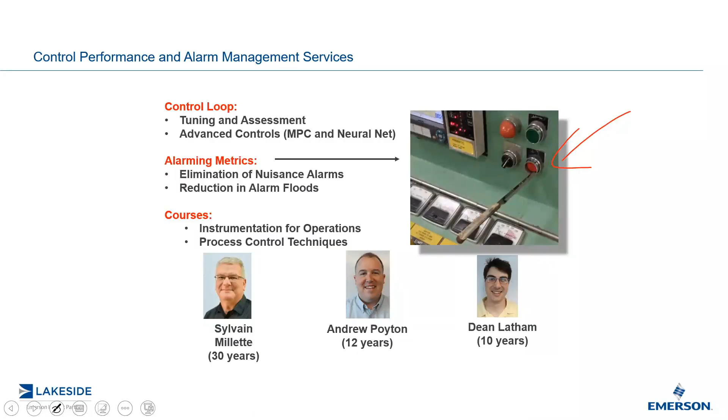And that's not a stock picture there. That's an actual picture that we took at a customer site, where this alarm kept going off and someone decided to stick a steak knife in there.

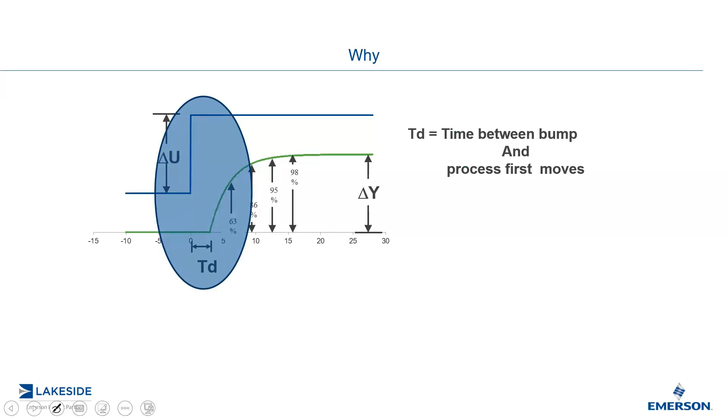So why? What is dead time? Dead time is the time delay. Please don't call it lag. Lag is a time constant. It's one of my pet peeves, but if you do, that's okay. But it is time delay or dead time from the moment I make my bump to the moment I first start seeing a change in my process.

A typical PI or PID controller is a very, very impatient beast. When it makes an output change, it expects to see a change right away on the PV, not, quote unquote, knowing that there's any kind of time delay. And so time delay is the single most destabilizing process parameter in the entire universe.

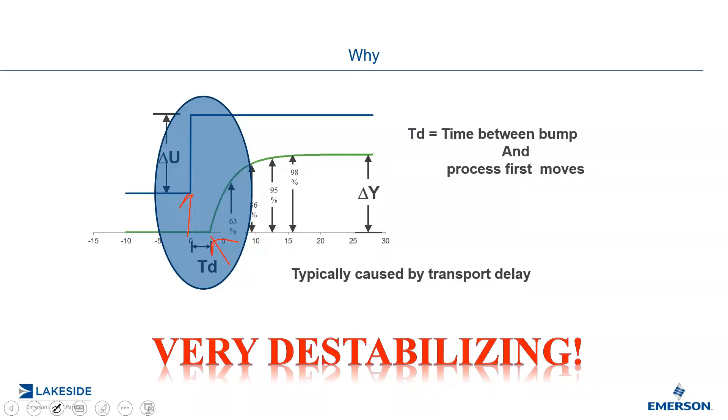Why do we have dead time? Well, some processes require dead time. So think about the pH here. We're adding caustic here, and obviously a chemical neutralization must occur before we can measure the pH.

As a matter of fact, I encountered that last week where it was effluent pH I was trying to control. I did some bump tests. This is a bit of a side note. I did some step changes back in July when the water was warmer, and the reaction was, quote unquote, normal. But what happened now is that we were measuring pH, but the temperature, instead of being 21 degrees, was 1 degree Celsius.

What I believe happens is that, as chemical reaction rate doubles every 10 degrees Celsius, the reaction rate was so much slower that I was actually measuring residual sulfuric acid, which is what I was injecting. And so therefore my process was extremely sensitive. The solution there would be to move the sensor further down to allow the sulfuric acid to react and therefore measure the proper pH.

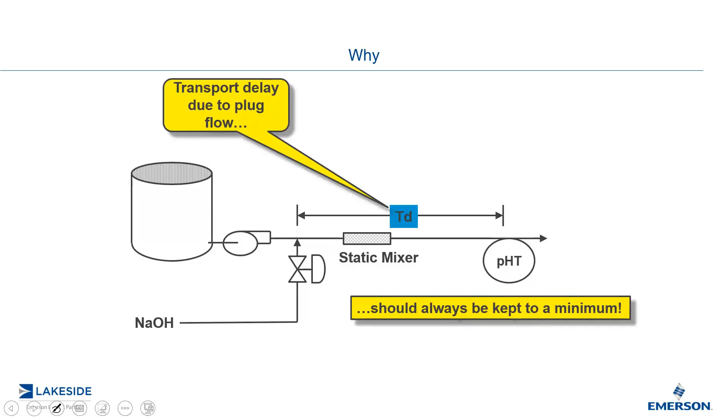But I digress. Now, the other issue here, when I say that the dead time should be kept to a minimum. And why is that? It's because I've seen a lot of times where we're going to install our pH over here somewhere. And even though we know that the chemical reaction will have occurred there, instead of having 20 seconds of time delay, we will now have 2 minutes and 20 seconds of time delay.

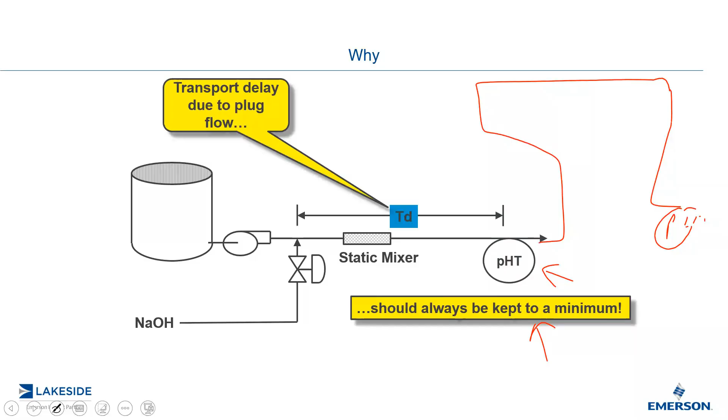I've seen this before, where they actually had to install a pH meter in another building because the other building was not an explosive atmosphere, and they didn't want to spend the extra money to buy an intrinsically safe pH meter and put it in the same building. So when we design our processes, it's important to understand, yes, some processes do require dead time, but keep it to an absolute minimum.

Not to say that a PI or a PID controller can't handle an excessive amount of dead time, but we have to build so much robustness, aka detune it a little bit, that we may end up losing out on control opportunities.

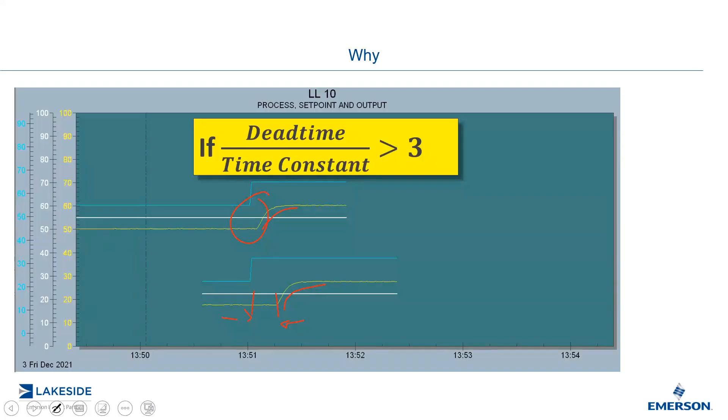Now, there are different types of dead time compensators out there. In DeltaV, there's the MPC block. MPC stands for Model Predictive Control. We have MPC, MPC Plus, and MPC Pro, and obviously it increases in complexity and capabilities. The MPC block, the most common one, can handle up to, I believe, 8 inputs and 8 outputs. So it can compensate for the time delays in your process.

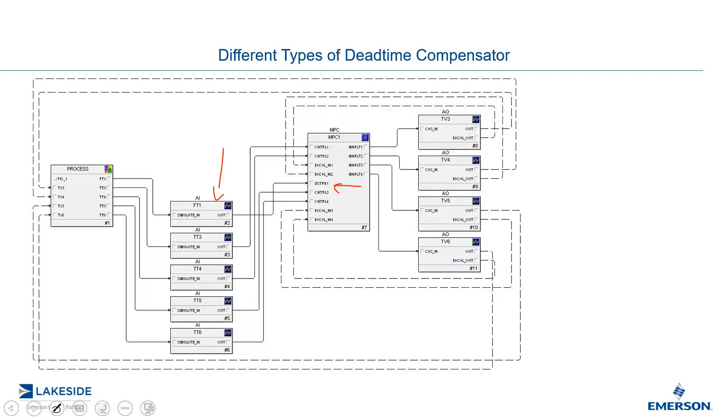There's also dynamic matrix control, DMC. I think Mr. Charles Cutler developed that in the 70s, if I'm not mistaken, for Shell Oil. There's also the Dahlin controller, which is used mainly in pulp and paper on paper machine controls. I'm sure there's a whole bunch of other ones out there as well.

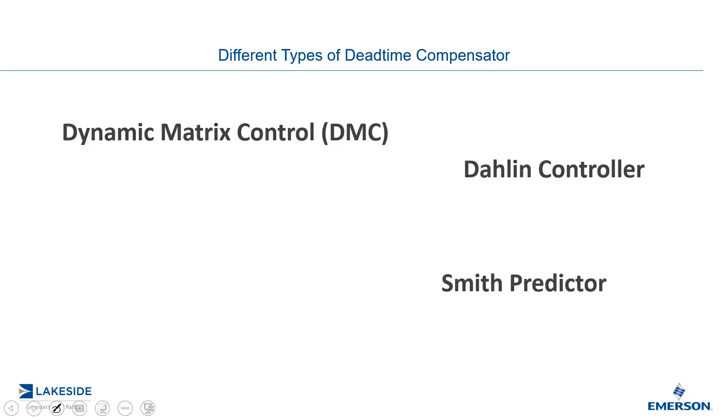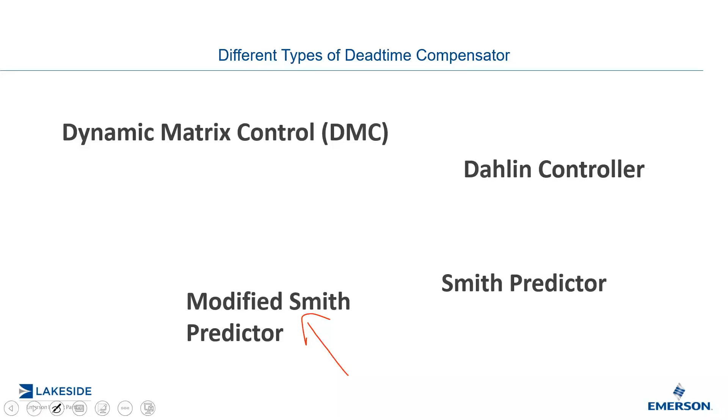They all have a similar, common theme, and I'll talk about that in a minute. There's also the Smith predictor and the modified Smith predictor. The modified Smith predictor is the one we're going to talk about today. I don't want to talk about MPC because you're not all DeltaV users. So I want to talk about something that you can build within your own distributed control system.

So how does this work here? So first of all, we got to understand the process. You've heard me say this before, thou shalt know thy process. And our process will have a process gain, a process dead time or time delay, and a time constant.

And what we're going to do is that we're going to build a model, aka a simulation, aka a digital twin. That's what they call it these days. I don't know why. It's just a model, a high fidelity model, where we know we'd have to do bump tests, and we know the process gain, we know the dead time of the process, we know our time constant, and therefore, obviously, this plus this is going to equal your process variable.

And then what we're going to do is that we're going to measure the difference between where our model prediction is and where our actual value is. The difference then will be either process disturbances or model mismatch. We'll talk about model mismatch later on.

Now you have to understand here that the PID controller does not look at the actual process variable. What it does is that it actually looks at the model value and the differences coming between the model and the actual process. And so what we're doing is that we're controlling a model and we're injecting real life information about the process through that addition block.

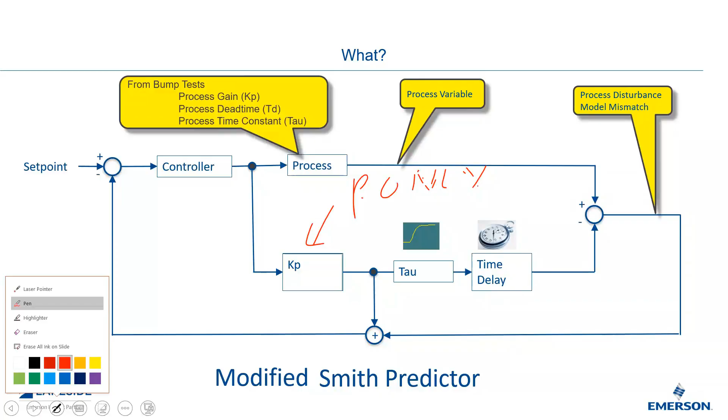So in this case, it's very difficult to tune a proportional only controller and have it overshoot and have it go unstable. So we're adding a bit more robustness by using a proportional only process. Once again, though, I'm going to repeat myself, the controller still works off the model, and we're injecting real life disturbance process information via the addition block.

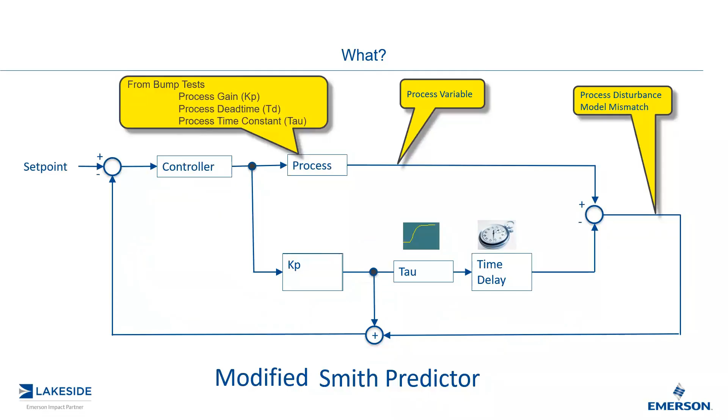So this is how I programmed it, and it's actually surprisingly simple to program this. So the upper part is a simulated process, obviously. And what I did is that I went through a characterizer block. I could put a mild nonlinearity there if I wanted to. I didn't. I left it linear. So basically just a linear input.

I put in 2 time constants of 2 seconds. So I made it second order just to make it a little bit funkier, a little bit different. There's my dead time block, and my process is at 15 seconds of dead time. That's the process dead time.

This here is a block where I can actually add a bit of noise, a bit of offset. And if I want to, I can actually inject a load disturbance. All that gets added up, and this is my process right here, right there.

Now for my Smith predictor, you can see I have my PID block right there, and it sends the output here, but it also sends it down to here. This is where I set my model, my simulation. I'm trying to simulate my process model. And if I do a good job, my process model will equal my process.

And here's my model process gain, my model time constant. Note here that I've only made it a first order process, so there's already a little bit of model mismatch going on, and my model dead time.

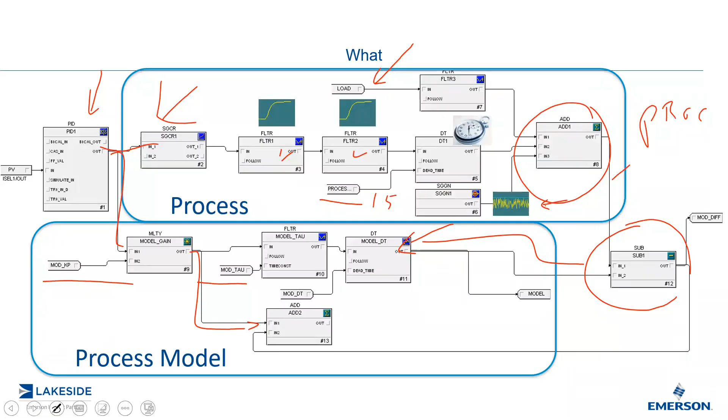If you remember before, so this is going to be my model here, and I am subtracting the model from the process, and then I'm adding that to the actual proportion only part right here. I know there's a lot of stuff being written here. Let me just erase all that.

And so what we're going to do is that part here will get sent over here as done programmatically. There you can't see a line, but they're actually connected. The PV then becomes input of the PID block right there. So what I'm going to do is I'm actually going to flip over and show you a live demonstration here.

So here are the model dynamics that I have right now. So I have a model dynamic of process gain of 1, a model time constant of 3 seconds, and a model dead time of 15 seconds. And right now we're all pretty much bang on in terms of our model. There's actually very little model mismatch.

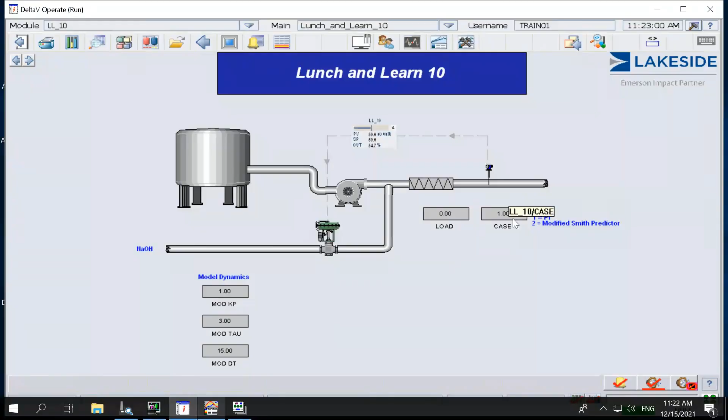You can see here I can add a load disturbance if I want to, and the case. So here, case 1 is PI control, and case 2 is your modified Smith predictor. So what I have done here is that right now I'm in PI control mode. And the tuning is just regular tuning. Here I have a controller gain of 0.3 and an integral of 8 seconds. So right now I'm in PID mode.

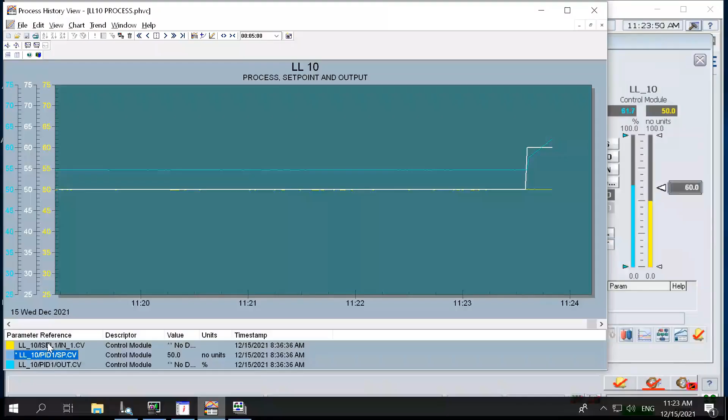So I'm going to change the set point here from 50 to 60%. And you'll see there's your output. For those of you who are not familiar, the blue line is the output command out of the PID. The white line is the set point of the PID block, and the yellow is the actual process variable.

And as you can see, the PID controller is reacting, and I tuned it fairly conservatively so that it will actually control. But obviously we have to compensate in our tuning practice, our tuning calculation, for the excessive amount of dead time, the 15-second dead time that we have here. And as you can see, it's reaching up, so it's actually pretty good.

So the next thing I want to do, this is kind of fun. I'm going to make the tuning more aggressive. So I'm going to increase the gain from 0.3 to 0.6. I'm doubling the gain. I'm going to make the integral faster. For those of you not aware, the smaller the number in integral, if it's seconds per repeat or minutes per repeat, the more integral action I have. And I'll make that 3 seconds.

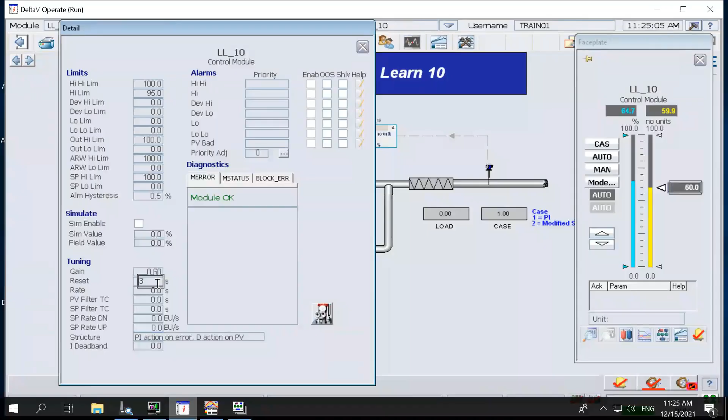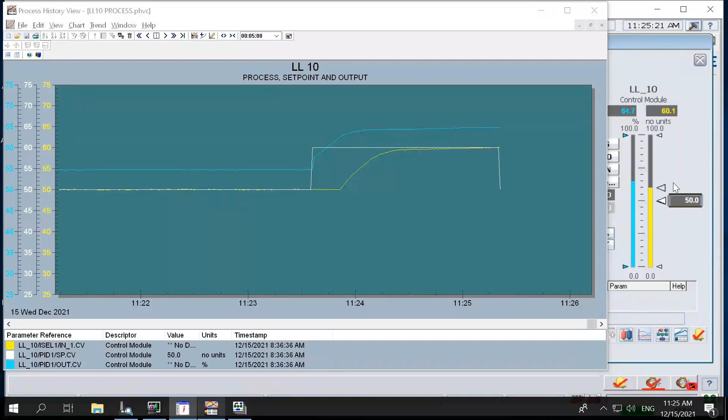So now I'm going to go back to my trend, and I'm going to make the same set point change back down from 60 to 50%. Now you can see there, obviously with the higher gain, I got a lot more proportional kick, and you can see the integral taking over because the PV still hasn't changed. It's ramping down very, very quickly. And now suddenly the process starts to react. And I'm pretty sure you can see what's going to happen. It's slowly going to go unstable.

Now I'm going to let it go for a little bit here, and then after that I'm going to switch over. As a matter of fact, this is really going unstable. So we'll just change the scaling here. There we go. So you can actually see it is going unstable. And obviously we tuned it way too fast because we have a dead time dominant process.

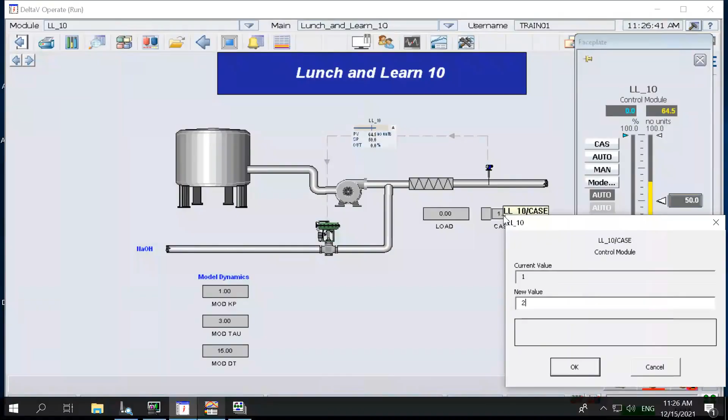So the next thing I'm going to do, oh, there we go. Okay. So what I'm going to do now is change the controller mode from a PI controller to the modified Smith predictor. Let's see how that works. So you can see here a little bit of jagged responses when I switched over. And that's because there's some slight model mismatch. Again, I'm going to talk about that later on.

Now, let's wait for a little bit here, but you can see obviously now the output is behaving a lot more stable. And you can see the PV will reach set point shortly.

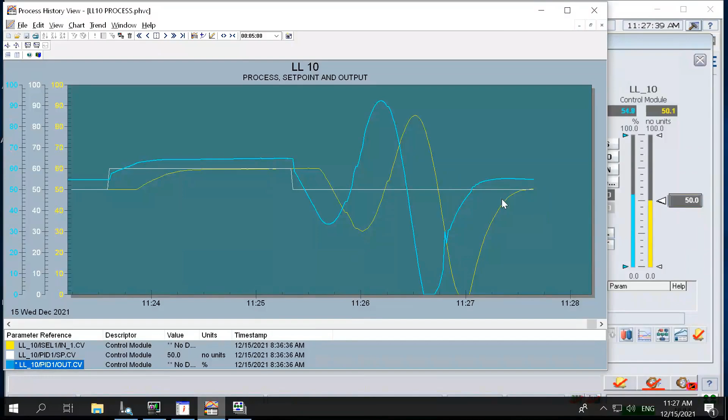So that was when I first tried this. I was still kind of amazed how just that one change made it very, very stable following the unstable part right here under PI controller. And what I'm going to do now is that I'm going to change the set point back from 50 to 60.

And you'll see the controller essentially is working off the model, but now also with real life process disturbances injected into it. And you can see the PV coming up to set point. So I'm going to show this a little bit more during my slides, but I just want to pause here for a second and just let you see how it reacts.

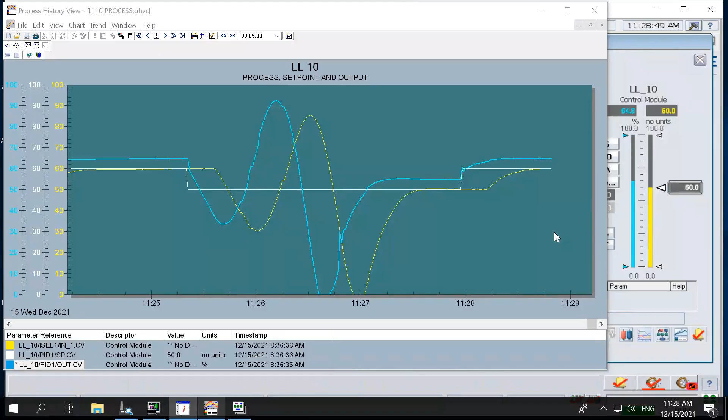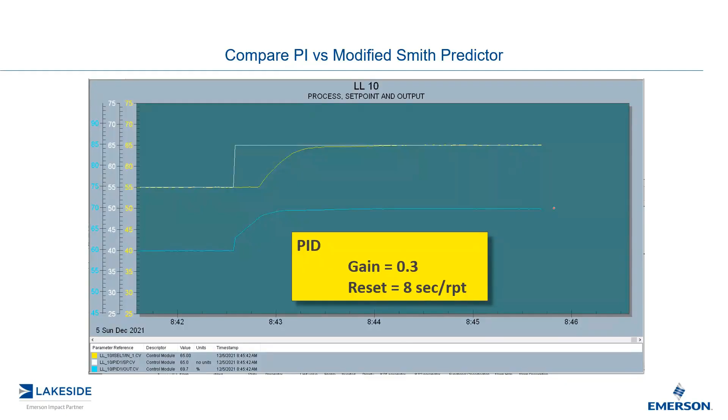And you've got to understand here that I've actually tuned it quite aggressively, very aggressively, but because of the model compensation, it's able to react properly. Okay. So this is a bit of a comparison. There's the same gain of 0.3 and a reset of 8 seconds. And using slightly more aggressive tuning, modified Smith predictor, I'm able to reach set point faster.

And again, as I just showed you here, you can see that little squiggly part here is when I switched it over from the PI controller to the model. There's a bit of model mismatch that can propagate through, but eventually it does stabilize. Now,

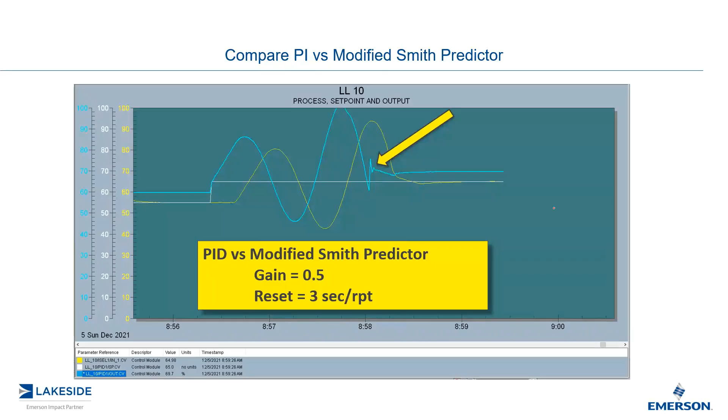one last thing I want to talk about is model mismatch, because that's a very, very big danger. What if our model is not perfect? And let's face it, it's not going to be perfect. There's always going to be some degree of model mismatch. And we try to make it as close as we can to the actual process. But right now, this is my perfect match, but now I have model mismatch.

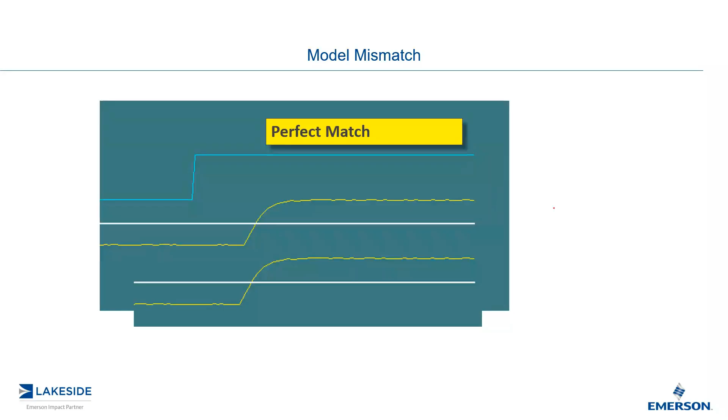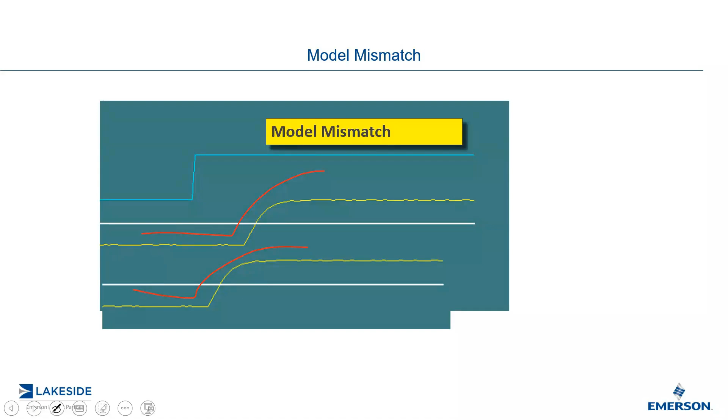So let's say here, even though our process reacts like this, we told our model it reacts like that. So the model no longer fits. And now we will be injecting false information into our controller, and then it will react to that false information, potentially destabilizing. And here is an example where I actually changed the model from 15 seconds down to 5 seconds. So that's quite a bit of difference. There's a factor of 3 difference.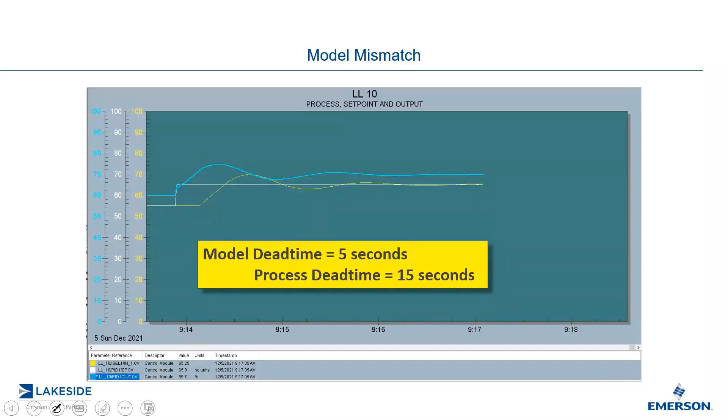If you change the model process gain, here I went from 1 to 1.2. Surprisingly, it's a lot more forgiving. And ironically, if you overestimate the model process gain, it kind of slows it down a little bit because the PID controller thinks, oh my God, it's more sensitive than it actually is. But it is a lot more forgiving. And the same thing with the time constant as well.

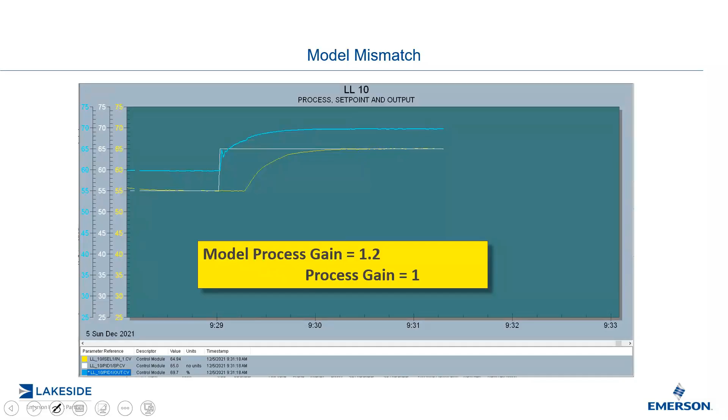So what happens though? Because we know in real life that the only constant of life is change. It's a very Buddhist principle. So therefore, if we know how our process is going to change, maybe we can adapt our model dynamically to keep it as accurate as we can. And we can do that if we have the right information by doing a dynamic model compensation.

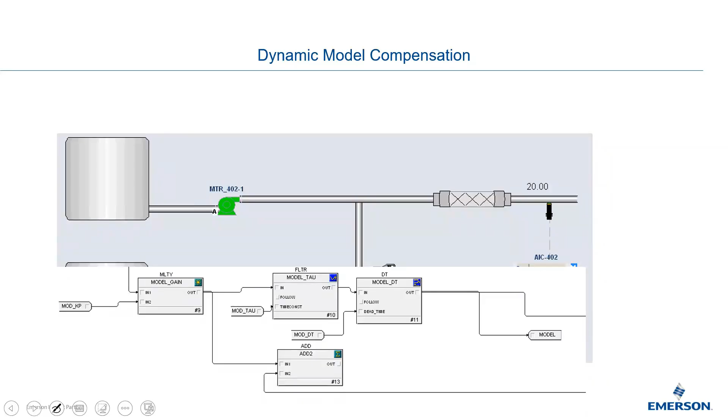So let's say here, obviously, I'm injecting caustic right here, and I'm measuring that pH over here. If I know my flow rate through there, I know my pipe diameter. As my flow rate increases, my dead time will decrease and the converse is obviously true. So if I know my flow rate, I just do a quick calculation, I could dynamically update the model dead time. Not only that, as the flow rate increases, likely your process gain may decrease. Depends on the type of process, but it can change.

And again, we would have to do some step changes, some experimentation, some bump tests to determine these changes. But as that flow increases, dynamically, I can actually reduce the model dead time. I can reduce the process gain by a certain amount. And then we could do that dynamically. And again, our attempt here is to make sure that we have as precise a model as we can have.

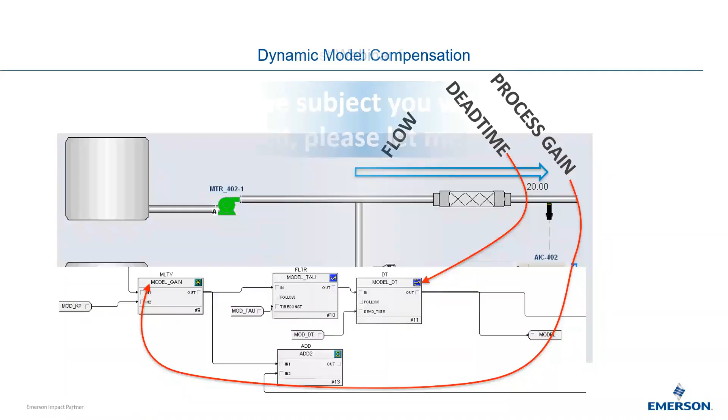And that kind of concludes this webinar. I know they're always kind of short and sweet, and I always wonder sometimes if they're not too quick, but feel free to ask me the questions.

So the question, how do you actually build a model? Essentially, you have to, again, understand your process here. And then your process gain is just a straight multiplier. And your time constant, it could be a filter block. So most control systems have filter blocks available to them for programming. It could be a filter, could be a lead lag block where you don't use the lead, you just use the lag. And a lot of controllers also actually have a time delay block as well.

Change the color to red. This is more visible. So, and I know even older DCSs actually had time delay blocks in there as well. So you got the filter block for your time constant, you got your multiplier block for your process gain, and you got a time delay. That's how you build it. And obviously, once again, you need to know your process first and try to simulate it, and that's how you build your block, your model.

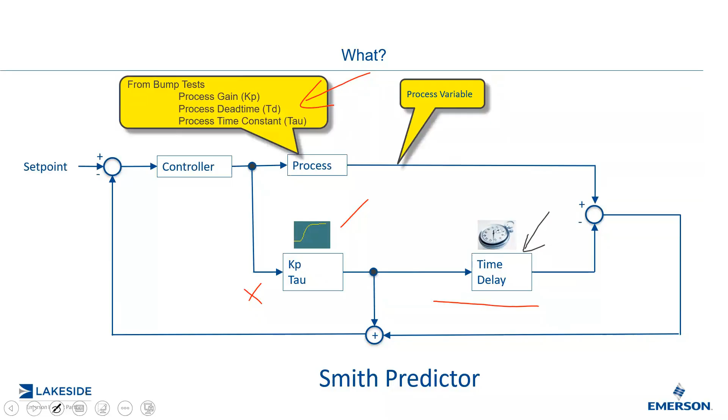Now, it doesn't have to be a first order model. I've seen places where instead of a first order model, it actually was an integrator, a level, and this was in the pulp and paper industry where you have a chip bin where you're measuring the wood chips level, but the amount of chips you're injecting is actually on a conveyor, which can be 20, 30, 40, 50 seconds behind. And so therefore, you could build a model based on that 20, 30 seconds time delay. And instead of putting a first order process, you put in an integrating process model. So I hope that answers that question.

So another question. Does the Smith predictor work on a nonlinear process with large settling times, such as a pH neutralization process? And the answer is yes, because you have a lot of flexibility in your model by being able to build it. And if you can characterize it properly, you can build some nonlinearities in your process model. I'm going to erase all that. Build some nonlinearity in your process gain, and try to make it match up as close as you can to your true process nonlinearity. So the answer is yes. That was a great question.

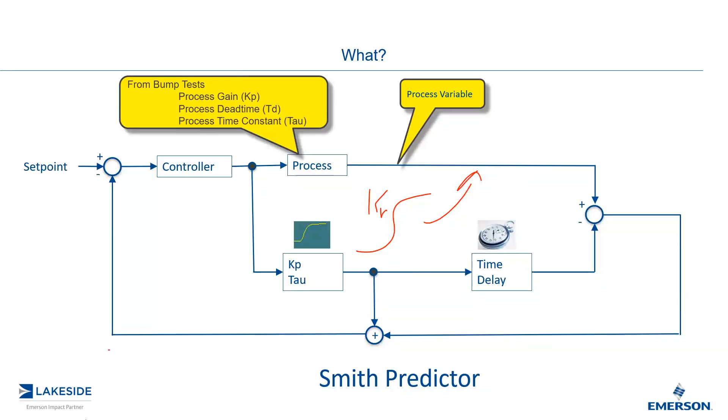So I'm still pausing here just to see if there's any more questions. There, we got another one here. Great. Is the dead time calculated as per process estimation? Some dead time may change, such as with flow rate, and you're absolutely correct. And once again, here, if I go here, hopefully if I hit the right slides, there we go.

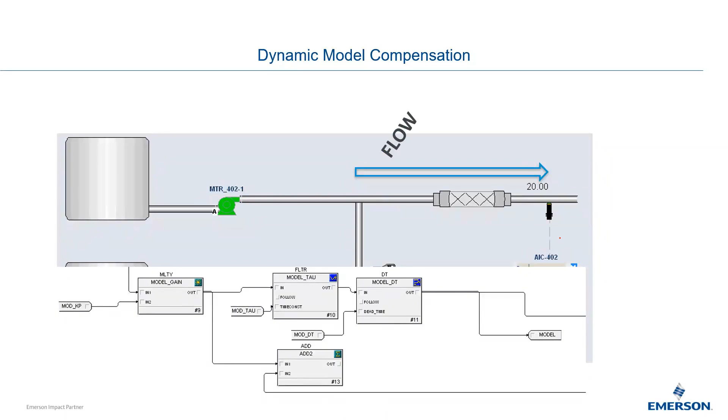This slide right here, your process dead time will change in this example here. And so if I know that flow rate, I know my dead time is going to change based on that flow rate, and then I can calculate that dead time based on the flow rate and the pipe diameter. So as the flow increases, I can then dynamically compensate for that change in flow rate in my dead time model, as well as in my process gain. So we can definitely compensate for that.

So the other question is, what is the actual advantage of the modified Smith predictor over the regular Smith predictor? The advantage is the fact that using a proportional only controller model-wise, it's very difficult to tune a proportional controller process and have it overshoot. And so it simplifies the tuning. So even if we don't have a lot of experience in tuning, because the model is a proportional model only, we don't have to worry about the dynamics, and it makes it a lot easier to tune. So that is the advantage, simplicity.

These are great questions.

And like I said, I'm not sure what kind of control systems you're all using, but I'm sure a lot of the more sophisticated ones do have dead time compensators. Some of them may be using Smith or modified Smith or more proprietary. And the common theme between any kind of dead time compensator, again, comes back to modeling your process.